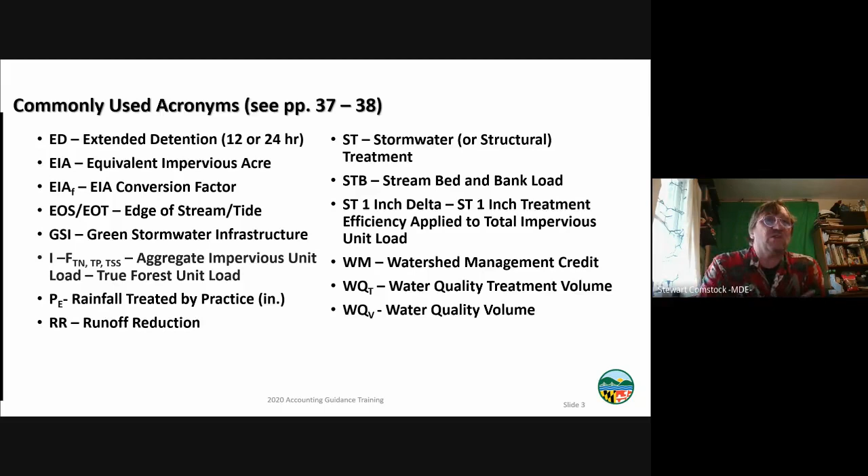You're going to hear us use I-F, which is the aggregate unit impervious unit load. PE is effective rainfall treated by a practice. We'll talk about STB, stream bed and bank load. We'll talk about an ST 1-inch delta. Finally, we'll talk about watershed management, water quality treatment, and water quality volumes.

When we talk about the restoration credits and accounting principles, imperviousness is still the MS4 permit surrogate for measuring level of implementation. The impervious acre credit is used for upland BMPs, in effect the Chapter 3 or Chapter 5 BMPs of the design manual. It is determined by three variables: drainage area, impervious area, and rainfall treated.

As in the 2014 guidance, impervious acres are 100% treated when the runoff from 1 inch of rainfall, or the water quality volume, is captured and treated.

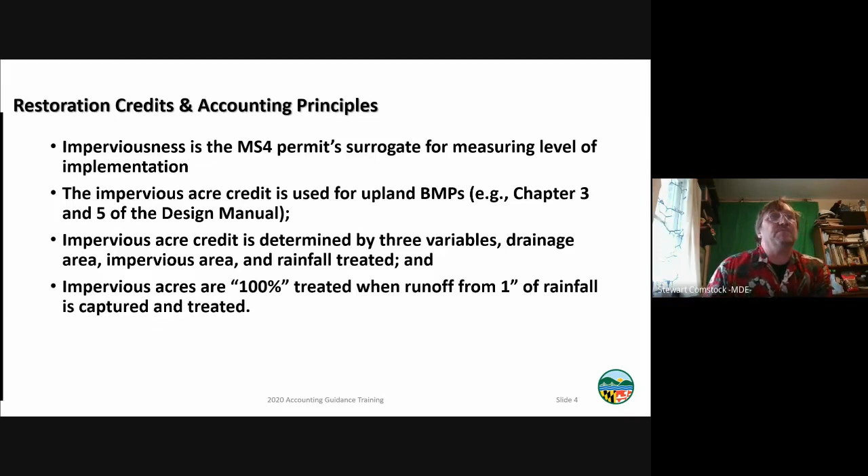With respect to alternative practices, we use the equivalent impervious acres. Alternative BMPs include the ones listed here, and we'll talk more about those later. The 2020 accounting guidance includes guidance for calculating equivalent impervious acres and pollutant load reductions. Again, these will be discussed in more depth as we move forward today.

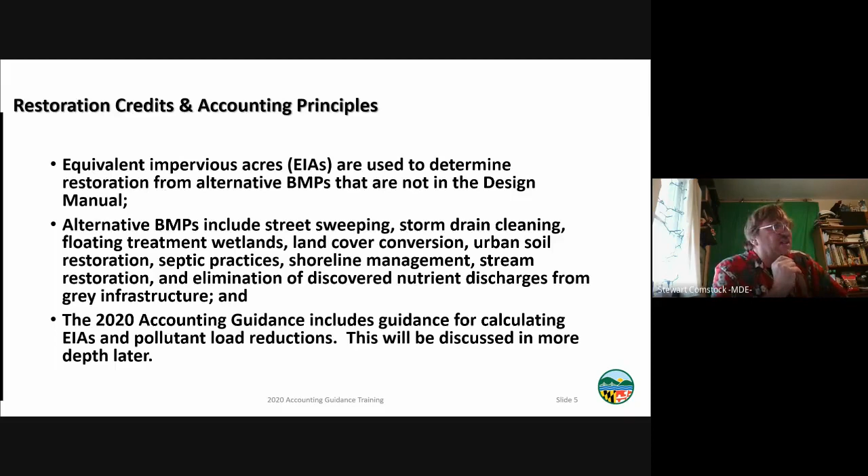So I'm here to talk about impervious acre credits for upland BMPs. Upland BMPs are those practices that meet the water quality criteria, the WQV, and design standards in the design manual. Chesapeake Bay program recognizes two categories of upland BMPs: runoff reduction or stormwater treatment practices.

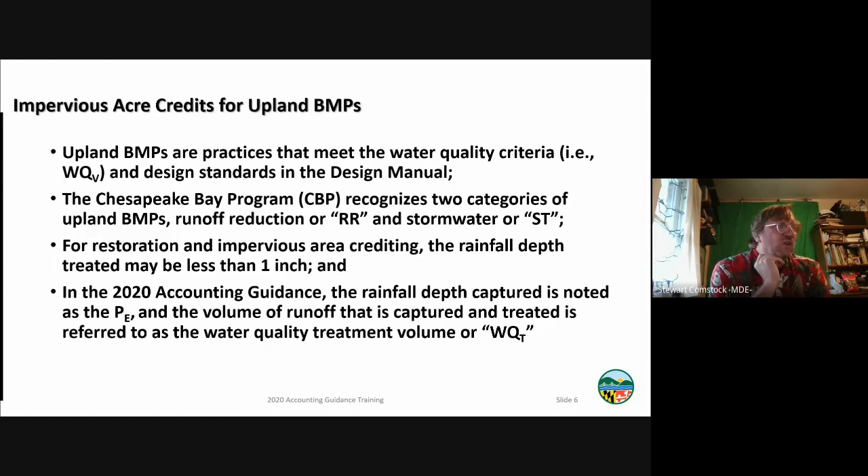For restoration and impervious acre crediting, rainfall treated may be less than 1 inch, and this is an important change. In the 2020 accounting guidance, the rainfall depth captured is noted as the effective rainfall, or PE. However, the volume of runoff that is captured and treated is referred to as the water quality treatment volume, or WQT. This is to keep it separate from the water quality volume found in the design manual.

This may look familiar because it hasn't changed from the 2014 guidance. The impervious acre credit for a structural practice is the rainfall depth treated over 1 inch up to a rainfall, or PE, depth of 1 inch of rainfall.

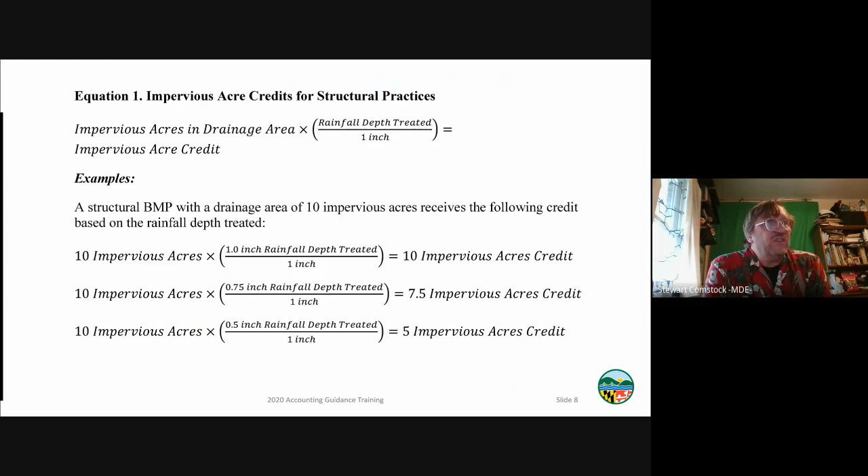So if I have 10 impervious acres and I treat 1 inch of rainfall, I get 10 impervious acre credit. Likewise, if I have 10 impervious acres and I only treat half an inch of rainfall, I only get 5 impervious acres of credit. Again, this has not changed.

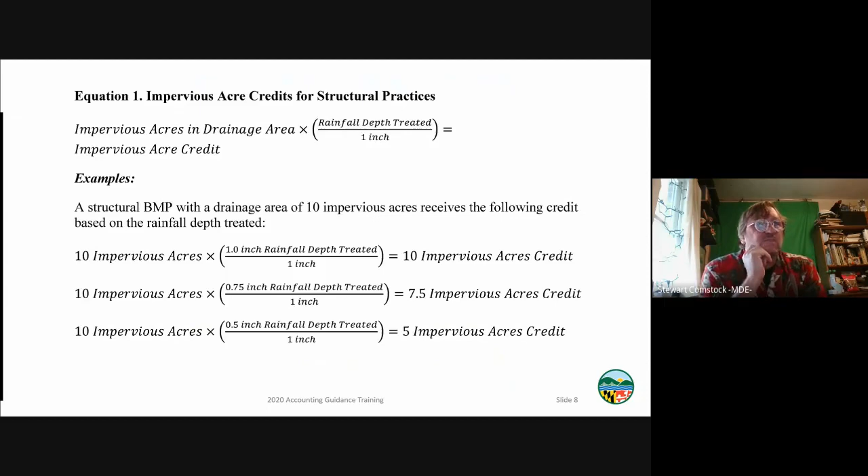Similarly, the way we assess non-structural practices and alternatives found on pages 4 and 5 of the accounting guidance has also not changed. So if you disconnect 10 impervious acres 100%, you get 10 impervious acres credit. However, if you only disconnect 10 acres 50%, you only get 5 impervious acres credit.

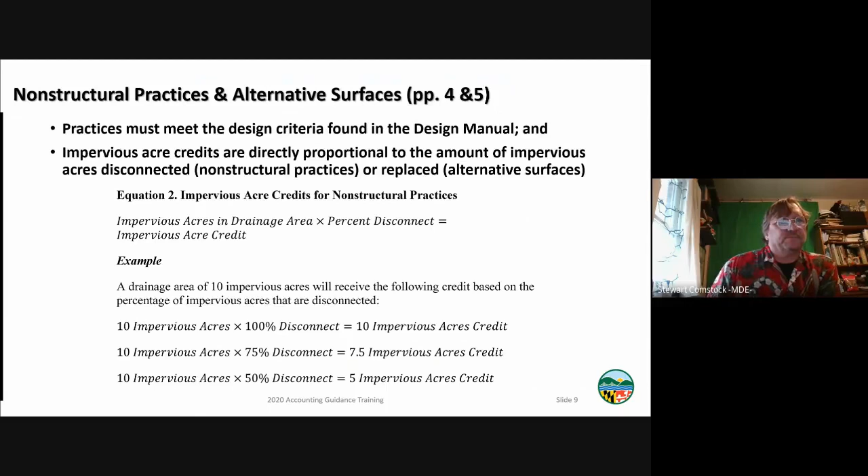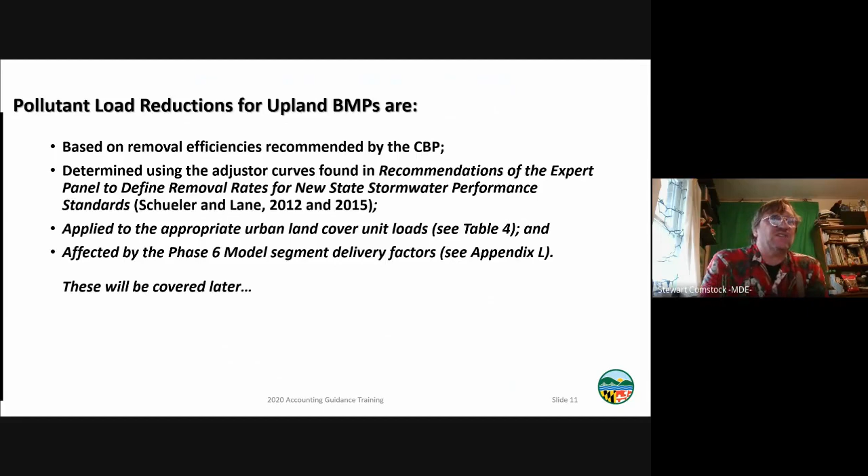I'm just going to briefly cover this because these will be covered in more depth shortly. Pollutant load reductions for upland BMPs are based on the removal efficiencies recommended by the Chesapeake Bay program. They are determined using the adjustor curves found in the publications from 2012 and 2015. They are applied to the appropriate urban land cover unit loads found in table 4 of the accounting guidance, and they are affected by the phase 6 model segment delivery factors. Again, some of this will be covered in the next presentation.

And here's table 3, found on page 8 of the accounting guidance, which talks about the pollutant removal efficiencies that may be applied to upland BMPs. Please note the 3 values at the bottom of the table highlighted in yellow. The Chesapeake Bay program charts only go up to 2.5 inches. However, for the purposes of the accounting guidance, we have extended those charts up to 3 inches.

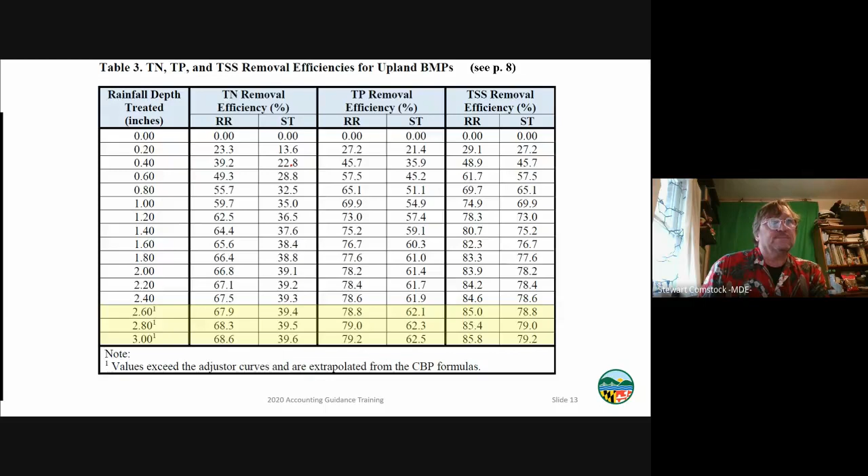Are there any questions at this point?

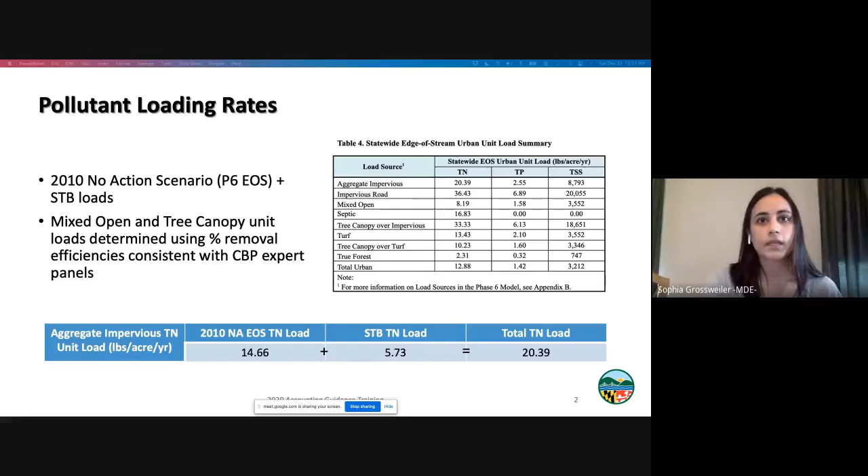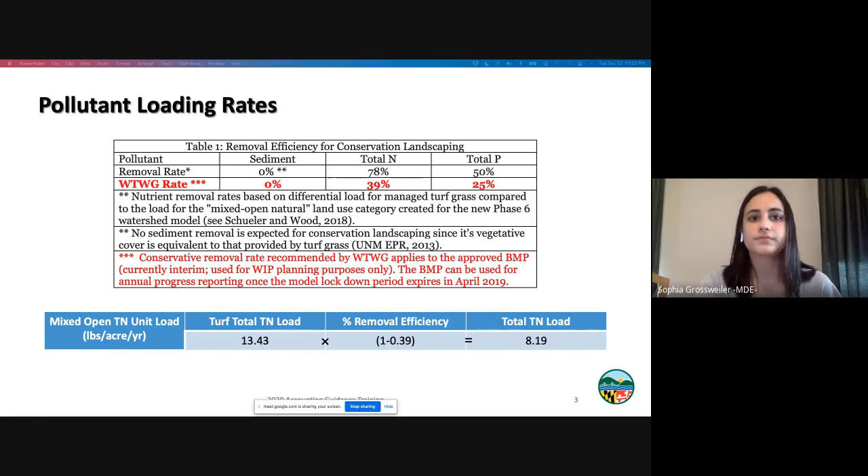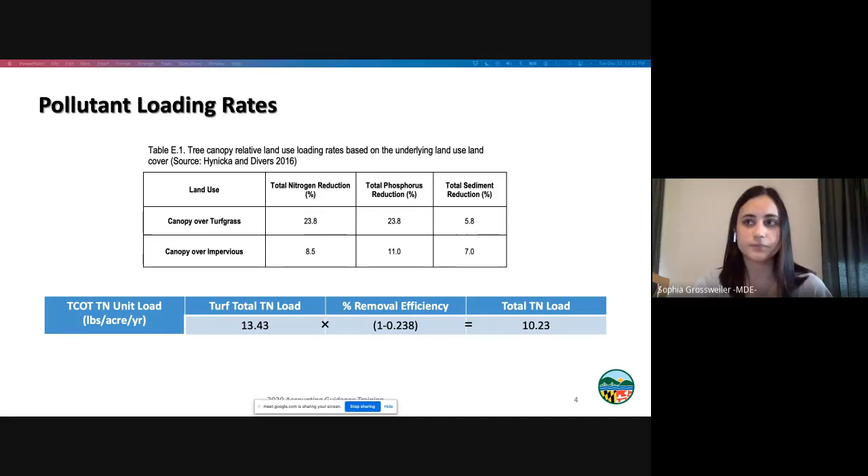To disaggregate the stream bed and bank load, we followed a method provided by Olivia Devereux, which was also presented at a previous MACO meeting and is detailed in Appendix E of the accounting guidance document. This process has already been done for you, and I'm only mentioning it here for transparency purposes—you're not required to perform these calculations.

But equation 17 in the accounting guidance document outlines the foundational formulas for calculating the stream bed and bank load using this method, and requires 3 main input variables: your CAST scenario edge of stream without STB load, a calibrated edge of stream without STB load, and an STB base load. The TSS STB load formula also requires an additional 4/3 times impervious TSS load.

So this is a very basic overview of the method, but for the sake of time and clarity, these are the 3 basic components of STB disaggregation.

First, you would use the equation 17 formulas to calculate each pollutant's STB load. You would determine a series of normalization ratios and then apply those back to your calculated STB load, which would ultimately result in your normalized disaggregated STB load. For more detailed information on this method, please see Appendix E in the accounting guidance document. Again, this process has already been done for you and you don't have to reproduce it.

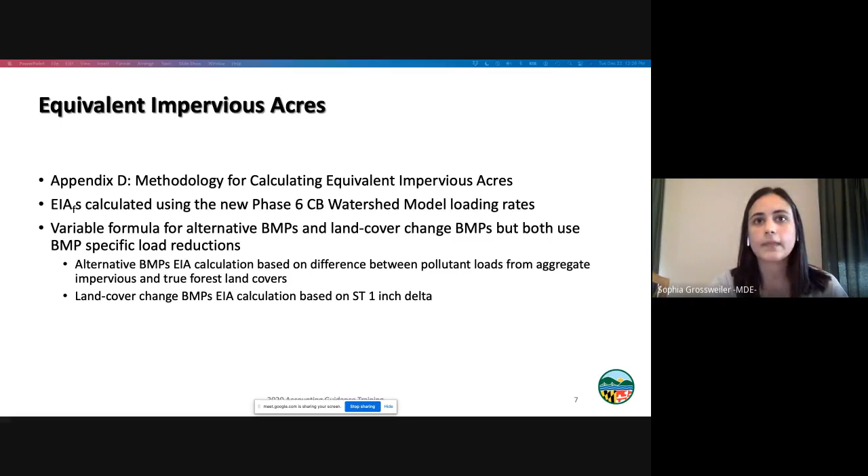Table 1 in the accounting guidance document outlines each BMP type mentioned in the document and their respective load reductions and equivalent impervious acre conversion factors. All load reductions and conversion factors have been calculated for you, so this would be your go-to table if you're trying to calculate your equivalent impervious acre credit. Appendix C outlines the load reduction formulas and pollutant removal efficiencies used to populate this table, if you're wondering.

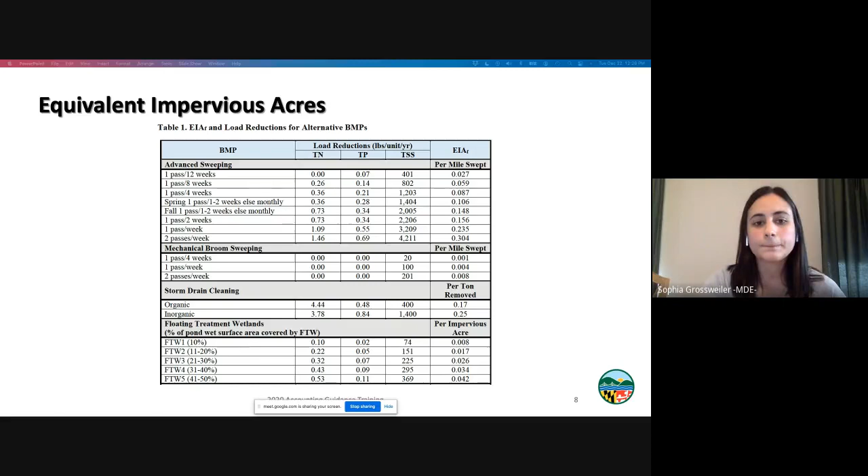Table 5 and Equation 5 in the accounting guidance document outline the process for determining an alternative BMP type's equivalent impervious acre factor. Table 5 shows how the impervious forest deltas are calculated—it's just the difference between aggregate impervious unit load and true forest unit load. These deltas are then substituted into Equation 5, dividing each pollutant load reduction, and the results of which are averaged, giving you the conversion factor.

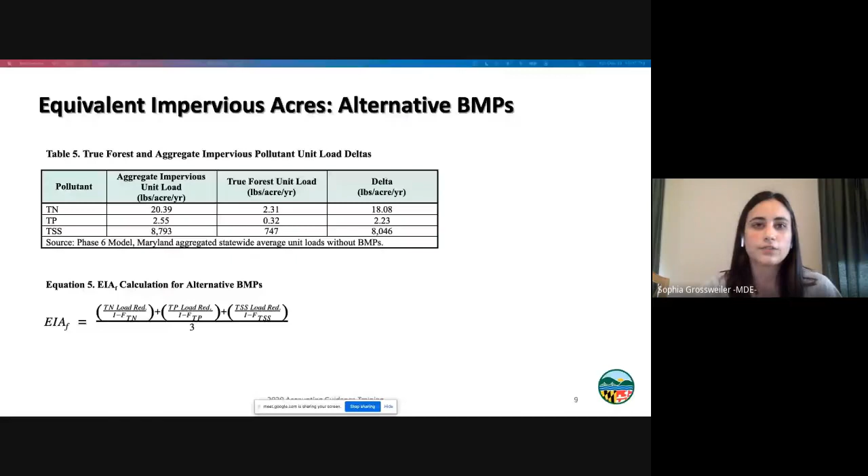So for example, if I wanted to check that the equivalent impervious acre conversion factor calculation in Table 1 was correct for an advanced street sweeping practice of 1 pass every 12 weeks, I would input the load reduction information listed in Table 1 into Equation 5, which gives me, as you see here, 0.027, matching what's in Table 1.

So this is just an example of what we've already done for you.

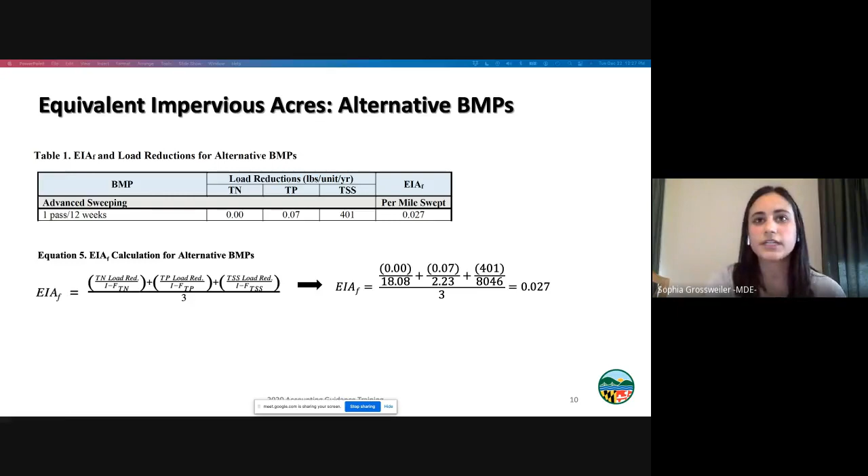Taking this example further, this example shown here is also taken directly from the accounting guidance document from Appendix F, which provides examples of calculating equivalent impervious acre credits for alternative BMPs.

To calculate my equivalent impervious acre credit for a street sweeping practice, I would need to multiply the number of miles swept by my equivalent impervious acre conversion factor.

So in this example, a jurisdiction is using advanced sweeping technology and sweeping 100 lane miles once every 12 weeks. So I'd go to Table 1 in the accounting guidance document and find what advanced sweeping practice that is and the conversion factor for it.

I would multiply that conversion factor, which is 0.027 in this case, by the number of lane miles swept, so 100 lane miles, and receive 2.7 equivalent impervious acres credit.

So for a land cover change BMP, Table 23 and Equation 16 in the accounting guidance document outline the process for determining this BMP type's equivalent impervious acre conversion factor.

Table 23 shows how our ST1 inch deltas are calculated, by multiplying our total impervious unit load by an ST1 inch pollutant removal efficiency.

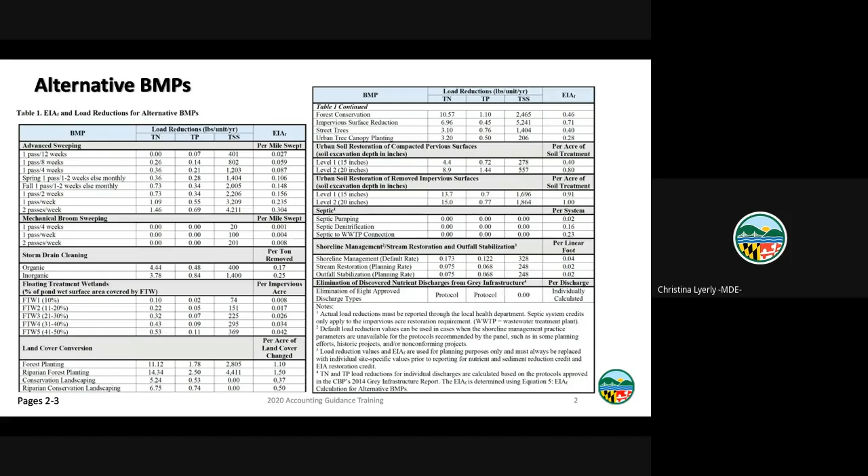If you would like to follow along, the table and page numbers throughout this presentation correspond to those in the June 2020 accounting guidance released with tentative determination.

The updated expert panel report provides considerably more options regarding the street sweeping frequencies MS4s can report and get credit for. Tonnage can no longer be used to calculate an EIA.

The expert panel determined that only a fraction of the solids picked up by sweepers would make it to the bay, and the WinSLAMM model is more technically and empirically based. The hopper method was prone to errors.

Curb lane miles swept are reported and represent one side of the street. When cleaning parking lots, 1 acre swept using advanced street sweeping technology is the equivalent of 1 curb lane mile.

Roads and parking lots without curbs and gutters do not get credit because the expert panel determined that they may create a net source of sediment if the adjacent pervious area is dislodged by the sweeper brush.

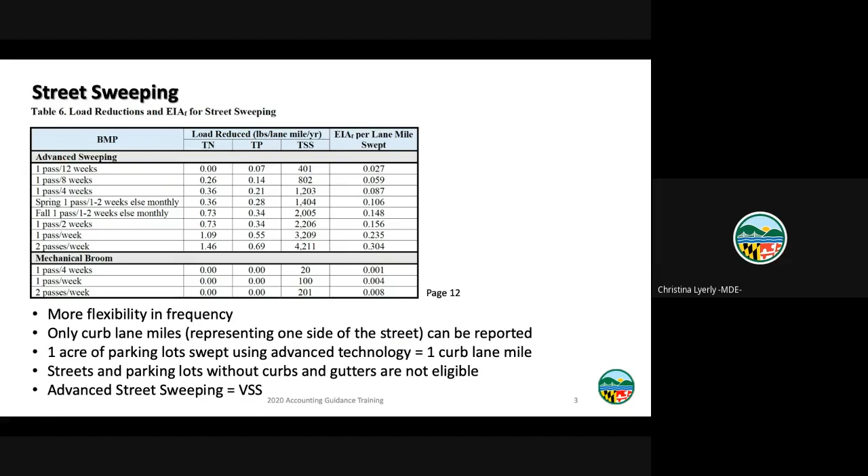Regenerative or vacuum street sweeping is referred to in the expert panel report as advanced sweeping technology, but the BMP code will remain VSS for the purposes of MS4 reporting.

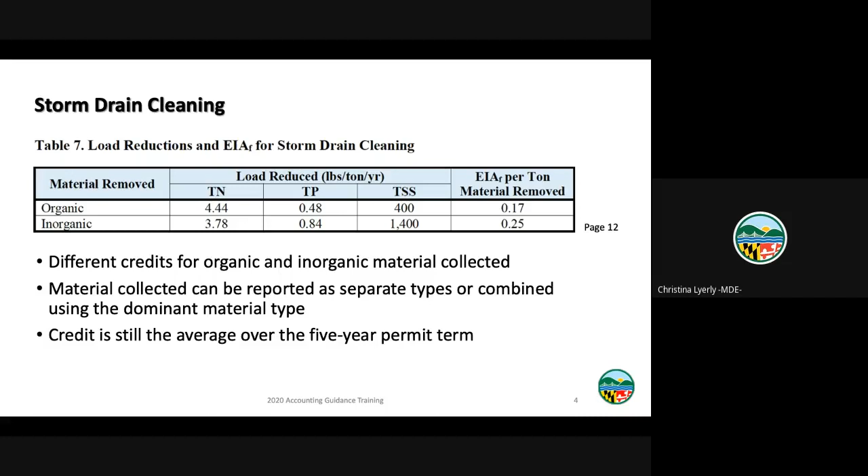For the storm drain cleaning BMP, there are different efficiencies and EIA factors for organic and inorganic material. MS4s can use their own process to best estimate the makeup of the material collected by storm drain cleaning. These can be reported either separately or as one by choosing the dominant material. These BMP efficiencies apply to what the geodatabase's BMP codes refer to as catch basin cleaning and storm drain vacuuming. This is still an annual BMP that is averaged over the 5-year permit term.

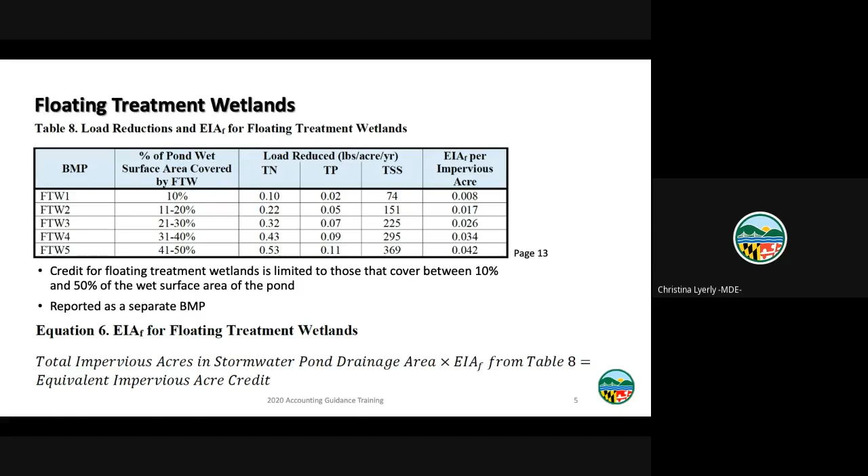The expert panel determined the pollutant removal rates for floating treatment wetlands based on the percent of pond wet surface area that they cover, as measured at the design permanent pool elevation. It is limited to between 10 and 50% coverage and is reported as a separate BMP from the pond. The equivalent impervious acre is simply the number of impervious acres in the pond's drainage area multiplied by the appropriate EIA factor found in this table.

As an example, there is a pond that has a rainfall depth treated of a half inch. There are 30 acres of impervious area draining to this BMP. As discussed by Stu earlier in the presentation, treating a half inch of rainfall provides treatment for half of the impervious acres draining to the practice. This pond would be entered as a BMP in the database as PWET. The 15 treated acres would be captured there.

A floating treatment wetland is installed in the pond. It covers 15% of the wet surface area. So according to this table, it would have an EIA factor of 0.017 per impervious acre in the drainage area. The EIA would be multiplied by 30 acres for an equivalent impervious acre restoration of 0.51 acres. This practice and EIA credit is reported separately as an alternative BMP with its own BMP code, XFTW.

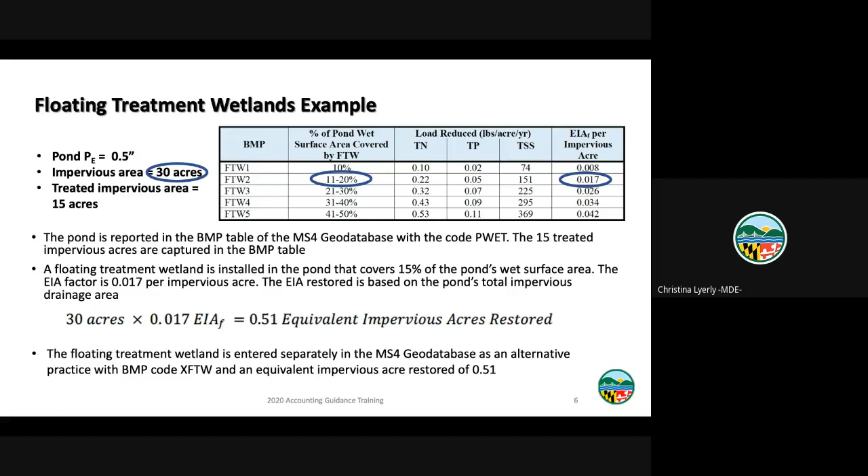The default rate can no longer be used for stream restorations or outfall stabilization, to be consistent with the expert panel report, which determined that individual site-level data collection is critical to improving the accuracy and consistency of calculations. The 0.02 EIA per linear foot can only be used as a planning rate. Final load reductions and equivalent impervious acres achieved can only be reported if the project is complete and all necessary site-specific data are collected.

The Chesapeake Bay Program approved updated methodologies for protocols 1, 2, and 3. The work groups recommended that these go into effect on July 1, 2021. The new protocol calculation memo includes a provision for Maryland to develop a state-specific treatable floodplain volume for Protocol 3. MDE will be looking into the research and technical justification to develop an allowable volume. This work will be completed by final determination.

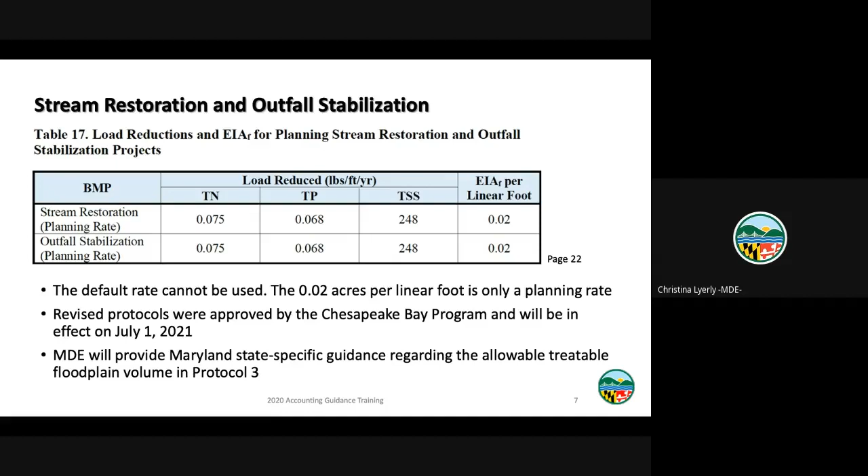A new BMP is the elimination of discovered nutrient discharges from gray infrastructure. What is unique about this BMP is that it has a maximum EIA credit that an MS4 can claim in a permit term. The CBP's Watershed Technical Work Group recommended a cap for nutrient reductions if the gray infrastructure loads were not explicitly simulated in the Phase 6 model. These loads were not simulated, but the expert panel has not reconvened to develop this cap.

Because the protocols allow default values to varying extents, and this is a new BMP that has mostly not been utilized, MDE took a conservative approach and followed CBP's recommendation. The maximum credit applies only to the EIA. There is no maximum for load reductions reported for TMDL progress.

The maximum is based on two assumptions provided in the expert panel report. First, nutrient discharges from gray infrastructure potentially contribute 20% of the dry weather load. And second, the dry weather load is 20% of the total annual nitrogen and phosphorus discharged from urban pervious land. This presentation provides a step-by-step example.

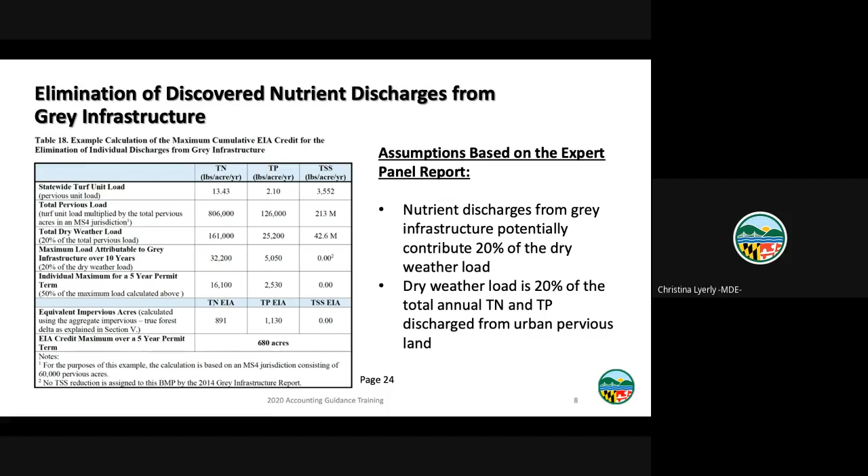The load attributable to gray infrastructure is associated with the total pervious load in the MS4, and this is where we begin. For the purposes of this example, the MS4 has 60,000 acres of pervious area, also known as turf. To find the pervious load, we multiply the unit load, or the loading rate of pounds per acre per year, by the number of acres. These unit loads are taken from Table 4 of the accounting guidance. So for nitrogen, it would be 13.43 multiplied by 60,000 acres to equal 806,000 pounds per acre per year.

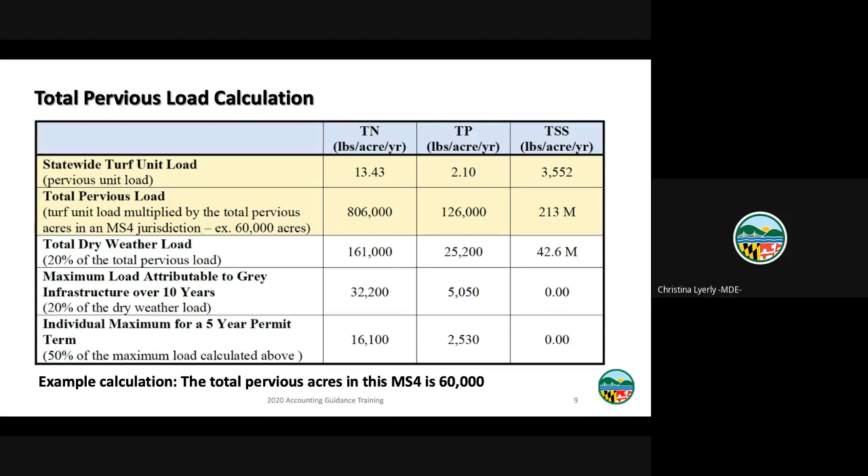Now that we know that the total pervious load is 806,000, we come to the expert panel assumptions. The total dry weather load is 20% of the pervious load, so 20% of 806,000 is 161,000. The load attributable to gray infrastructure is 20% of the dry weather load, so 20% of 161,000 is 32,200. This is over a 10-year period because the expert panel limited the lifespan of these credits to 10 years. They expire in the model as well as in the impervious acre restoration tally.

In order to continue receiving credit after 10 years, new nutrient discharges must be found and eliminated. The expert panel created this limit because gray infrastructure will continue to deteriorate over time, so a reduction in one point of the system may ultimately be negated by a new discharge.

Permit terms are 5 years, not 10, so the maximum load reduction credit in a permit term is cut in half. You'll notice the maximum sediment load is 0. This is because the expert panel report determined there was a lack of data, and the data available showed generally low concentrations.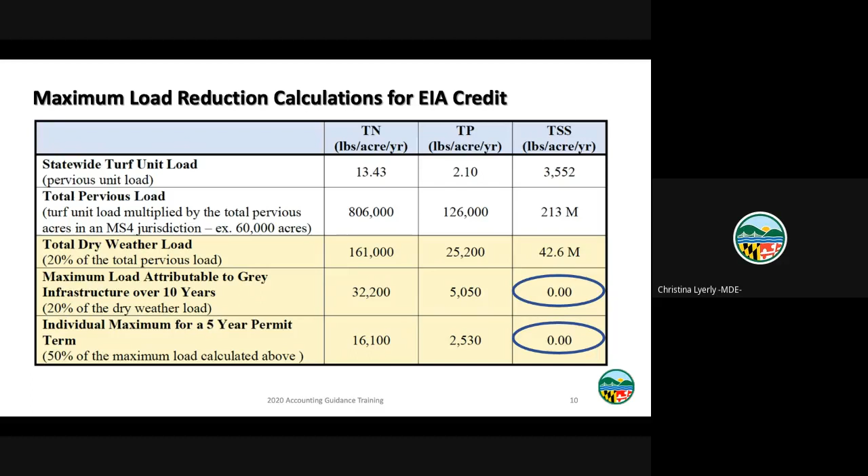For simplicity's sake, we condensed all of those steps, including the multiplication for the percentages, into a single equation found in the accounting guidance. The maximum load reduction in a 5-year term is the statewide turf unit load times pervious acres in the MS4 jurisdiction times 0.02.

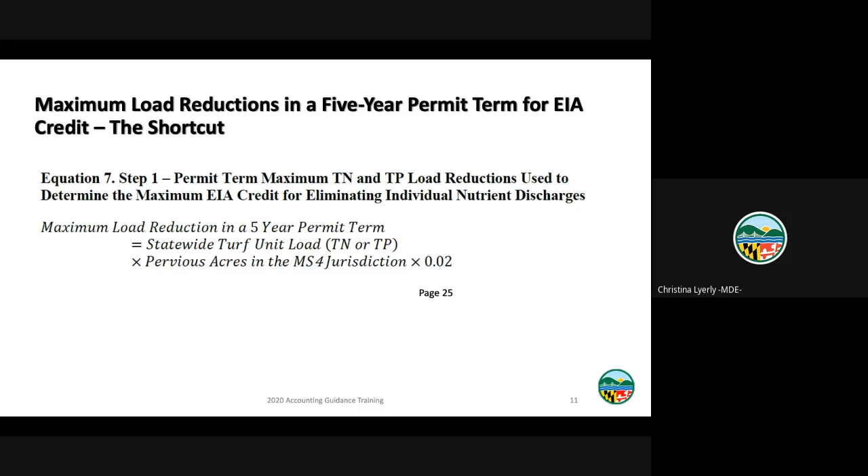The final step in this process is converting the maximum loads into a single EIA maximum credit. The impervious forest delta conversion equation used for other alternative BMPs applies here. The numerator is labeled a bit differently because it represents the maximum load reduction rather than the achieved load reduction. These TN/TP load reductions are inserted as the numerator, and the impervious forest delta values of 18.08 and 2.23 are standard values in the alternative BMP conversion equation.

The expert panel allows reductions for 8 types of discharges and details 3 protocols to calculate the reductions. The expert panel also specifies monitoring and verification requirements for each. Once you calculate your TN and TP reductions using these protocols, use the impervious forest delta EIA equation to determine the equivalent impervious acre restoration achieved.

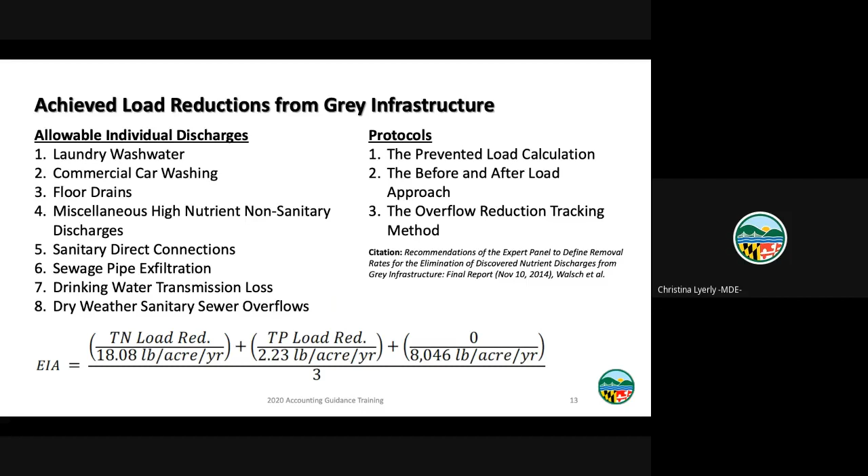The accounting guidance details several qualifying conditions. Prior to the date when individual discharges could be reported in the model, the expert panel provided an opportunity to claim nutrient reductions achieved through an advanced program. This was to give jurisdictions time to ramp up the data collection required to report individual discharges. The program credit is no longer available.

However, MDE has established that meeting the advanced program criteria as defined by the expert panel is a precondition for receiving credit for individual discharges. This ensures that reductions cannot be claimed simply by meeting the basic IDDE permit requirements.

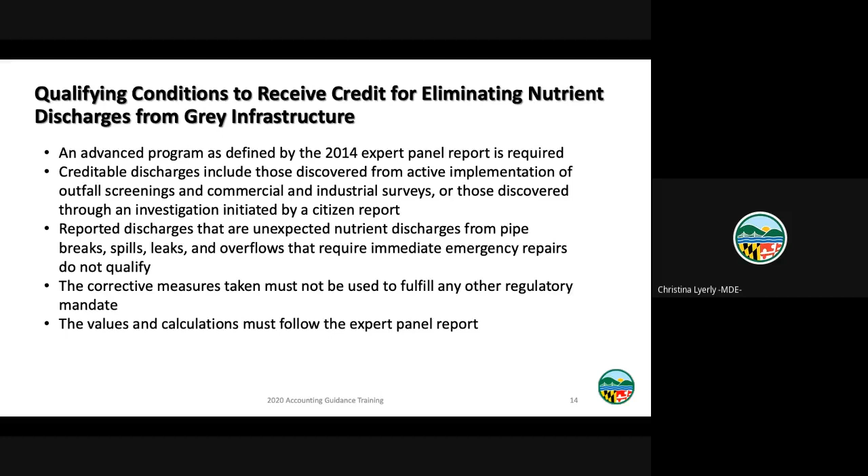The elimination of discharges found from outfall screenings and commercial and industrial surveys, and those resulting from investigations initiated after a citizen complaint, are eligible. Reported discharges that are unexpected and require emergency repairs, such as pipe breaks, cannot be claimed. The corrective measures cannot be required under another regulatory mandate, and the expert panel protocols must be followed.

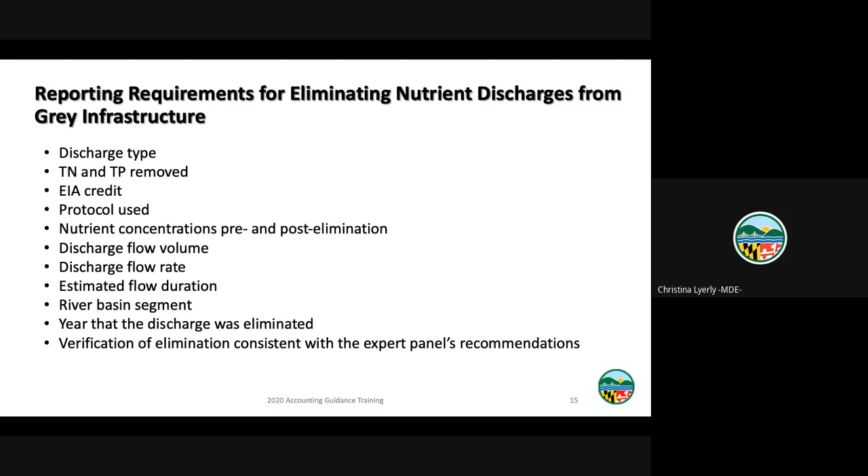The expert panel recommended a minimum set of data that should be reported to the regulatory authority to receive credit. MDE based the reporting requirements on those recommendations. The upcoming revision of the geodatabase will allow these discharges to be reported and credited as an alternative BMP.

Now, before I hand it over to Shannon to discuss land cover conversions, I'd like to pause here for any questions. Hi, Christina, very good.

We do have a couple of questions for you. Let's start with the IDDE. For inlet cleaning, what is the evidence needed for identifying the percent organic versus inorganic? Would visual estimations be sufficient?

Visual estimates are sufficient. The accounting guidance discusses that a process needs to be in place in order to come up with a best estimate.

Okay, great. And staying on IDDE, can you explain why the IDDE credit is cut in half for the 10-year credit? It's a cumulative credit with a 10-year cap. This calculation makes it appear that you'll only get half the credit in any given permit term.

For the credits you can receive in, let's say, the next 5-year permit term, that permit term is 5 years. You would receive credits up to half of that maximum EIA. Then in the next permit term, those credits don't expire, so it's cumulative. You would continue to receive credit for additional illicit discharges eliminated. We just cut it in half for the sake of the permit term.

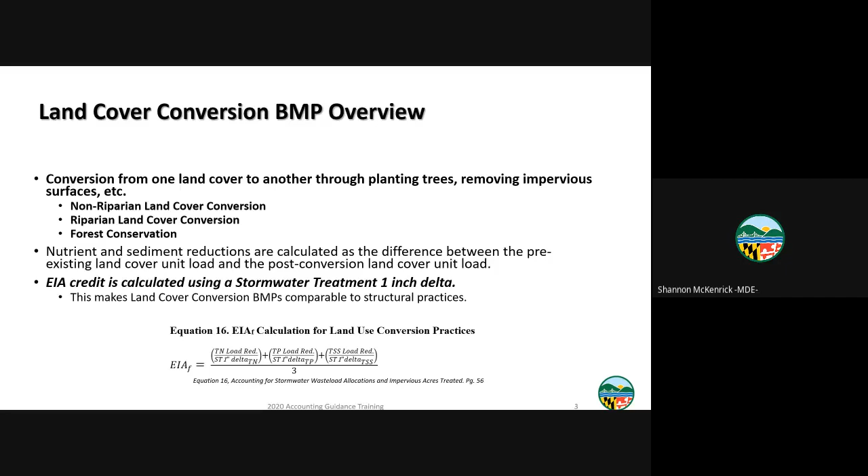Starting with forest planting, this is the conversion of turf to forested land cover. Conservation landscaping is the conversion of turf to an unmanaged meadow, using the mixed open land cover to calculate the credit. Impervious surface reduction is the removal of impervious surface to turf. Street trees is any tree planting occurring over an impervious surface, such as those in a sidewalk box. Note that for this one we use an impervious road unit load as the pre-conversion unit load to calculate credit, done to ensure a positive credit. Lastly, the urban tree canopy planting credit is the conversion of turf to tree canopy over turf.

Note that these land cover conversions can be combined for additive credit. So if a jurisdiction is undertaking a project to convert impervious surface to canopy over turf, the credit available for that project would equal the impervious surface reduction credit plus the urban tree canopy credit. In other words, the practice would be receiving credit for the conversion of impervious to turf, and then the conversion of that turf to tree canopy over turf.

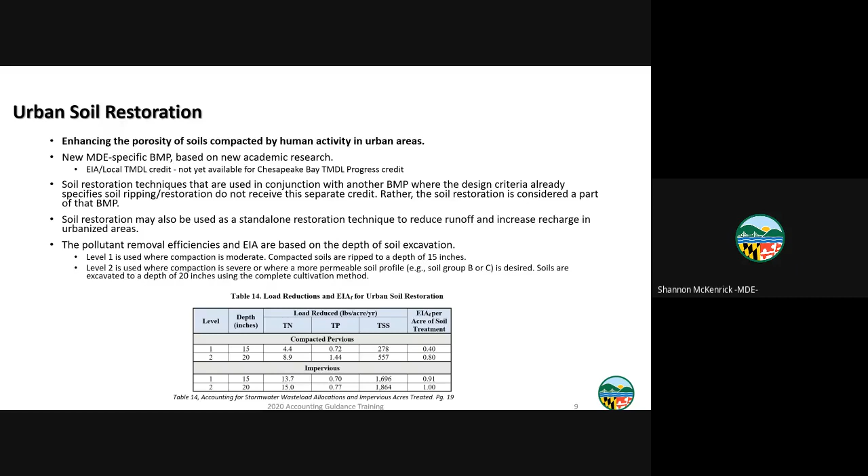And with that, I'll take any questions you have for me. Okay, Shannon, good job. We do have a couple of questions for you.

The first one: is there a difference in turf definition or crediting when trees are planted in an agricultural field within 100 feet of a stream? For example, would it be credited as ag field conversion or as a turf conversion? If the underlying land use is turf and it's not an actively producing ag field, there shouldn't be any difference in the available credit. However, in the accounting document we only have credit provided for a conversion from turf or some of these urban land uses to canopy over turf. If you were trying to receive credit for converting an ag land use, while the calculation would be similar, we'd have to look into that and get back to you.

Okay, great. And then another one on reforestation regarding the 1 acre minimum: this means that any reforestation smaller than 1 acre will be credited as tree canopy over turf, even when the ground cover will be managed as forest floor and the land will have the water quality functions of a forest. This will make many reforestation projects less effective, including expanding existing forest and riparian buffers by planting along the forest edge, or creating small reforestations within developed areas with fragmented cover.

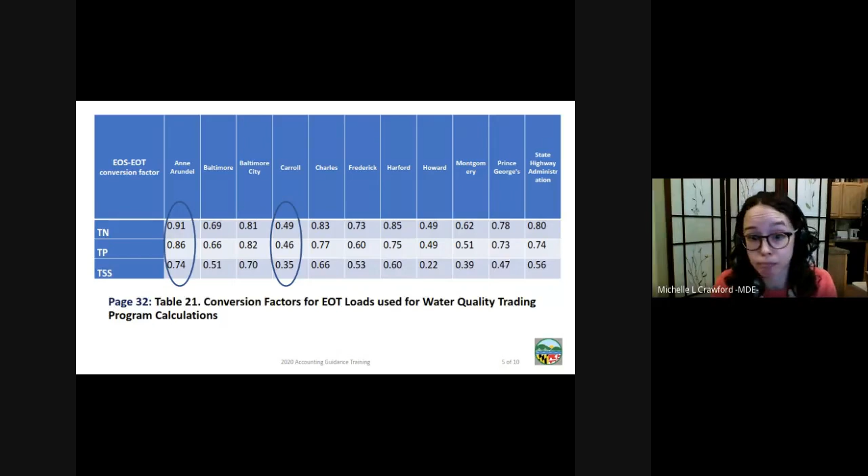So here, using 1 county as an example, you would need to acquire 17 nitrogen credits, 2 phosphorus credits, and roughly 6,000 credits of sediment. All three of these types of credits gathered together restore 1 impervious acre. So that's the first option.

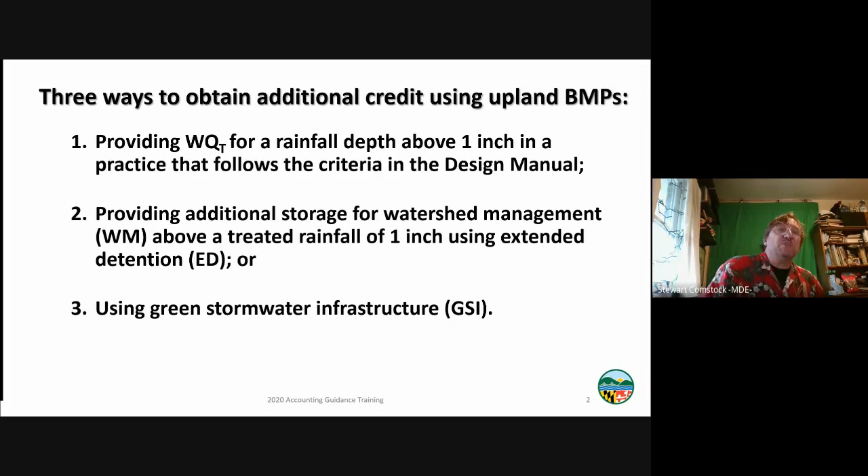So this is a review. Credit for additional water quality treatment. The impervious area credit is based on watershed imperviousness and depth of rainfall treated, and is 1-to-1 or 100% when you treat a rainfall of 1 inch. There is a 1-to-1 relationship between the rainfall depth and acres treated up to that rainfall depth or WQT of 1 inch.

However, it is quite conceivable that best management practices may be designed to treat more than 1 inch of rainfall. However, we have to recognize that when you treat more than 1 inch of rainfall, the pollutant removal efficiencies of these BMPs oftentimes is much less than that when it's between 0 and 1 inch.

So when the water quality treatment is greater than 1 inch, but less than 3 inches, the ratio of rainfall depth and impervious acres treated decreases to 0.25 to 1, or you get 1/4 of an acre for every inch above 1 inch of treatment that you provide in water quality.

The reason for this change, and this is the Chesapeake Bay adjuster curve for total phosphorus, is that the slopes of the lines from 1 inch to 3 inches is much less than the slope of the line from 0 to 1 inch, right? It's about 1/4 less, and therefore you get 1/4 of an acre for every inch of rainfall as opposed to 1 acre for every inch of rainfall.

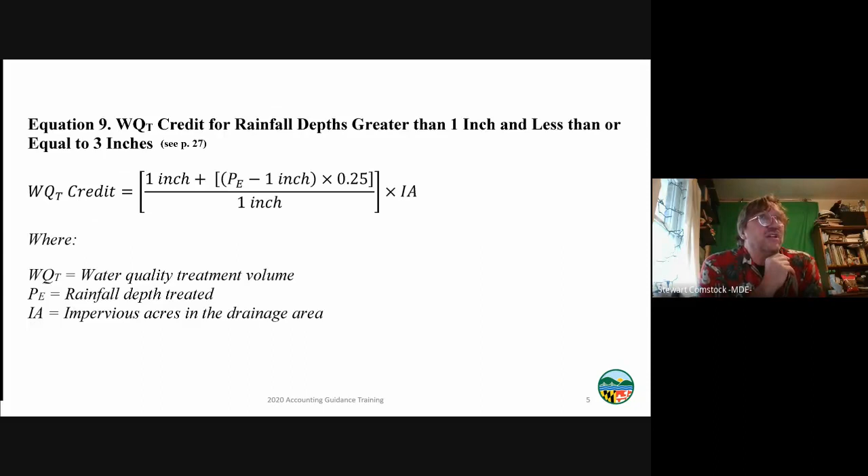So for example, I have a permanent pool here of 1 inch. I also have extended detention storage equal to 1 inch. Please note that because the permanent pool is 1 inch and the extended detention storage is 1 inch, this is a 50%, 50%. That additional 1 inch of storage may be considered as part of the water quality treatment.

So in this case, the water quality treatment credit would be the 1 inch treated by the permanent pool plus the 2 inches total, 1 plus 1 equals 2, minus the 1 inch treated in the permanent pool times the 1/4 acre, which would equal 1.25 times my impervious acres. So if I had 10 impervious acres in the watershed, I would receive 12.5 acres of impervious credit for this practice.

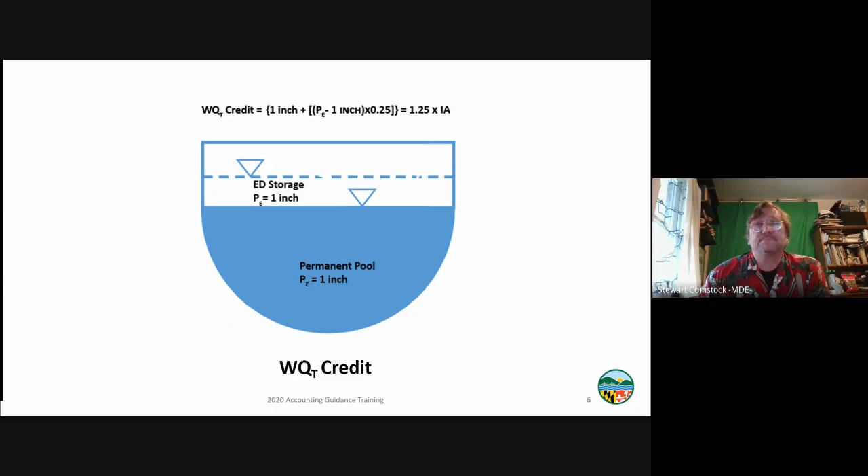Now, we also recognize that BMPs may be designed to provide multiple functions, and one of those might be flood control, and there might be additional storage above the water quality treatment that is providing some form of flood storage, but may not meet the 12-hour or 24-hour extended detention criteria.

However, these upland BMPs with additional storage are more resilient to changing weather patterns. And so we do want to give you additional credit when extended detention is used to release additional rainfall. The credits are available for temporary storage volume for rainfall depths between 1 and 3 inches. And again, it's at that same ratio of 0.25 to 1.

Now, I know this sounds a lot like the water quality treatment volume we just discussed, but hang in there. Like the water quality treatment volume, the watershed management credit is calculated the same way. It's the rainfall treated minus the water quality treatment times 1/4 over an inch.

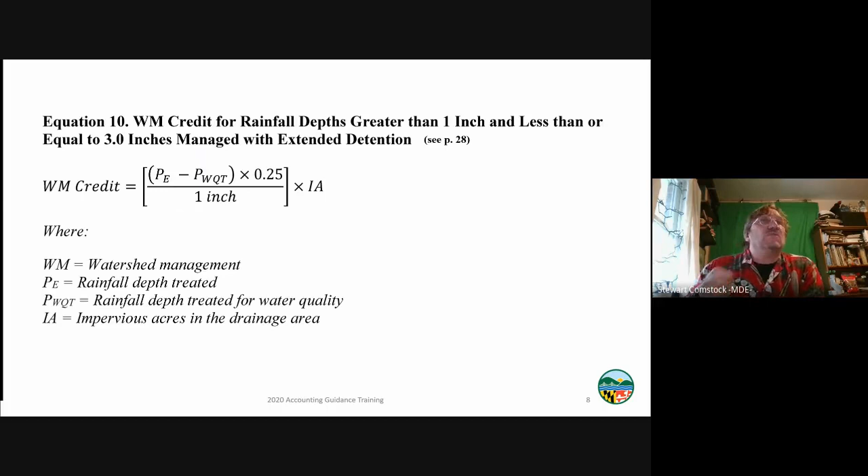Let's see how it's different. In this example, I have a permanent pool equal to 1 inch, with additional storage in this practice up to 2 inches. However, my ED storage for water quality treatment must be no more than the same as my permanent pool—it has to be a 50-50 split. So if my permanent pool is 1 inch and my ED storage is 1 inch, any additional volume above that for extended detention would now be considered my watershed management credit.

In this example, my water quality treatment credit is still 1.25 acres, as we calculated earlier. However, because I have this additional inch, I can multiply that by 1/4 as well. So my total credit is the water quality treatment credit plus the watershed management credit, which is now 1.5 times the impervious acreage. So if I had 10 impervious acres in the watershed, I would have an impervious acre credit of 15 acres for this practice.

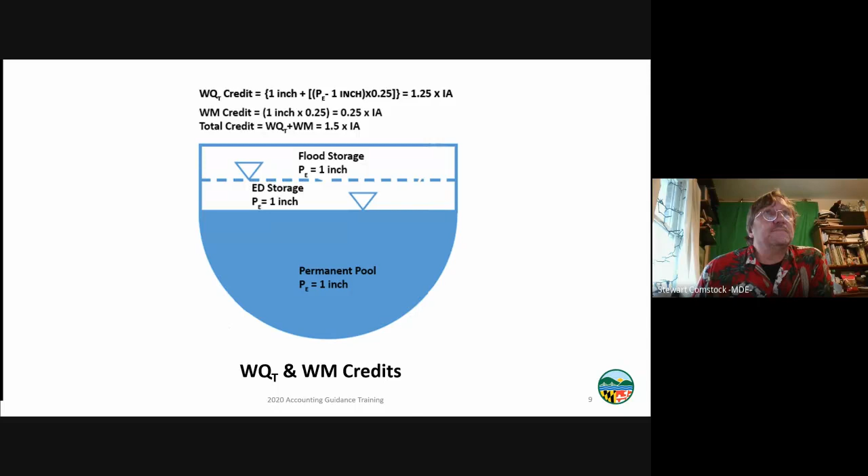The third co-benefit listed in the accounting guidance is credit for green stormwater infrastructure. Upland BMPs that provide water quality treatment and incorporate natural processes are eligible for the Green Stormwater Infrastructure Credit. These features mimic the pollutant load reduction efficiencies of runoff reduction practices in the Chesapeake Bay Program curves. Runoff reduction practices are about 35% more effective at removing TN, TP, and TSS than their stormwater treatment counterparts. Therefore, green stormwater infrastructure practices achieve a credit equal to 1.35, or 35% more, than the impervious acre credit achieved through just straight water quality treatment.

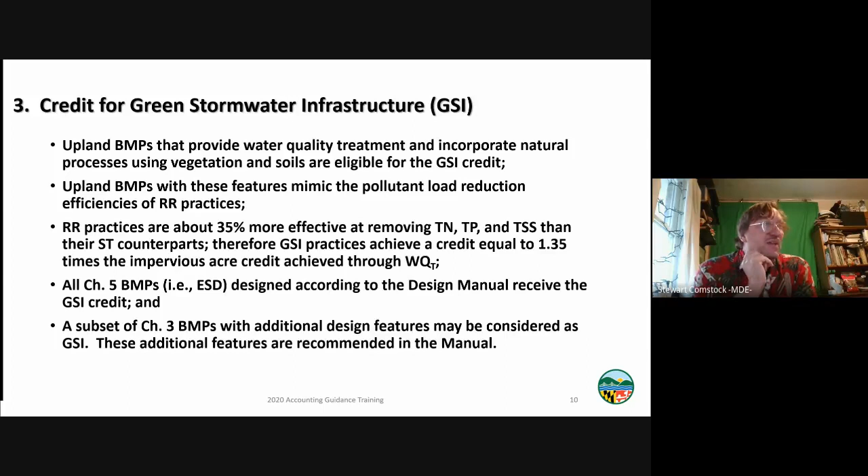Please note, all Chapter 5 best management practices—ESD, designed according to the manual—receive the GSI credit. Additionally, there is a subset of Chapter 3 practices with additional design features that may also be considered as green stormwater infrastructure. These additional features are oftentimes the recommendations found in the design manual for these various practices.

So where did we come up with this 35%? Here's this Chesapeake Bay Program adjuster curve for total phosphorus. As you can see, there's a difference between the runoff reduction and the stormwater treatment practices. On average, when you look at all three curves, this is about a 35% difference, and so we're going to give that additional 35% impervious acre credit. In the 2014 guidance, there was no such credit given whether you're using a runoff reduction or stormwater treatment practice.

As I mentioned, all Chapter 5 practices are considered ESD and therefore are also considered runoff reduction. Several of the Chapter 3 structural practices—most of the ponds and wetlands—may be considered green stormwater infrastructure with additional bells and whistles.

Please note, infiltration trenches, infiltration basins, surface sand filters, organic filters, pocket sand filters, and bioretention are on the list and may also be considered green stormwater infrastructure if the recommendations in the manual, which I'm about to list again, are followed. Bioretention from Chapter 3 has fewer requirements than microbioretention from Chapter 5, and that is why it is on this list.

Please note, if your practice is located under pavement, or is an underground practice, or is encased in concrete and does not mimic natural processes, it's not going to be eligible for the Green Stormwater Infrastructure Credit.

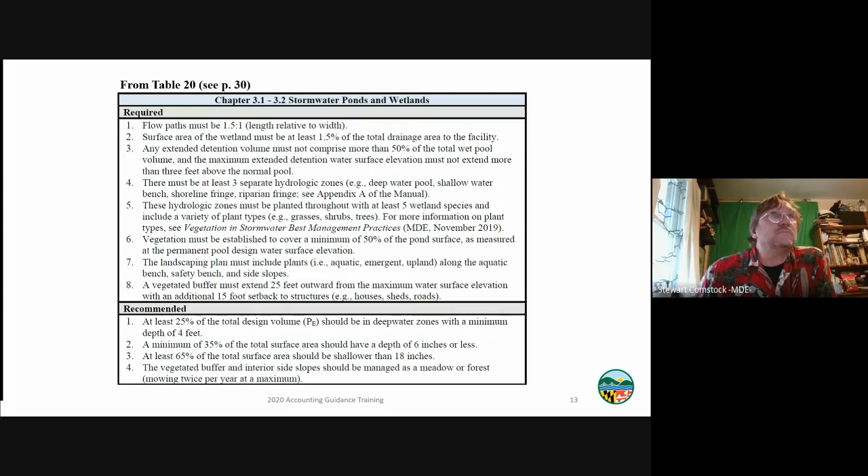Also from Table 20 on page 30 are the required and recommended elements for stormwater ponds and wetlands to be considered green stormwater infrastructure. Please note that these features are mostly related to the type and amount of vegetation being established in the facility. Much of this guidance comes from the Vegetation in Stormwater Best Management Practices guidance published by MDE back in November of 2019.

Again, many of these things are recommendations in the 2000 manual. So the Green Stormwater Infrastructure Credit only applies to the water quality treatment portion of any credits previously calculated, and it is 1.35 times the calculation of the water quality treatment credit.

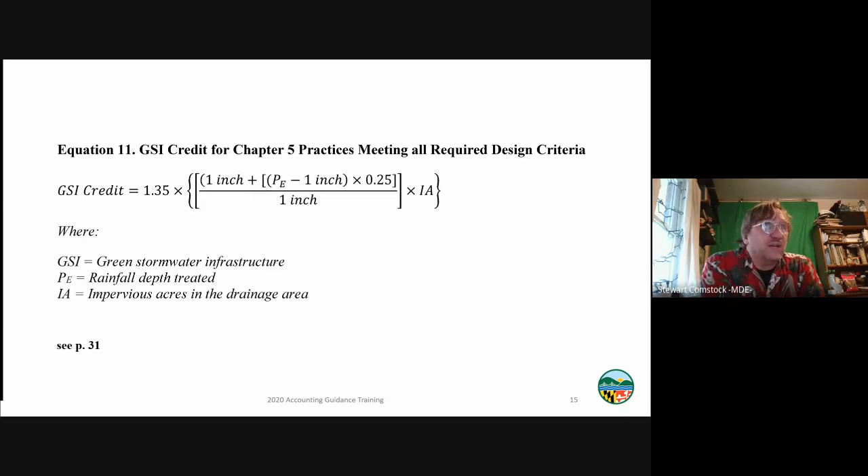So in this example, I've got a wet pond. It's got a permanent pool equal to 1 inch and ESD storage equal to 1 inch. So I have 2 inches of water quality treatment. But the whole facility has been designed as green stormwater infrastructure.

The water quality treatment credit is 1.25 times the impervious acreage. However, because this is now considered green stormwater infrastructure, we multiply that by 1.35, and so the new impervious acre credit for this facility is 1.69. So if there were 10 impervious acres draining to this facility, it would now have an impervious acre credit of just under 17 acres.

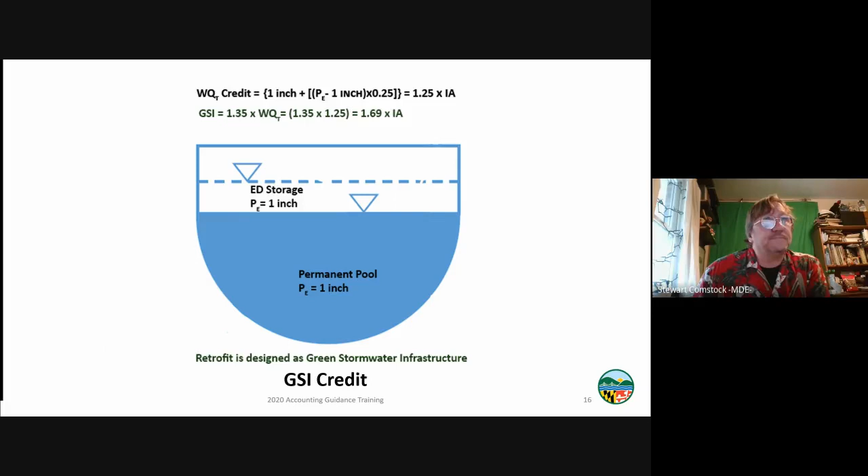Okay, it is completely acceptable to combine these credits. Obviously, upland BMPs may include additional water quality treatment. They could have additional storage volume, and all or parts of the facility could be considered green stormwater infrastructure.

If the GSI credit is applicable, it replaces the water quality treatment credit. As we've just seen, you would multiply the water quality treatment credit by 1.35. If the upland BMP can claim the watershed management credit and the green stormwater infrastructure credit, the watershed management credit above the water quality treatment volume is added to the GSI credit for the total credit for the project.

Again, just as a reminder, for water quality practices with extended detention, 50% of the total water quality volume provided can be in the form of extended detention. So if I had up to a total PE of 3 inches, how would I get 3 inches? The wet pool would have to be designed to capture or have a PE of 1.5 inches, and the extended detention volume then could be an additional 1.5 inches.

However, if my wet pool has a PE of 1 inch, then the maximum water quality treatment credit I could claim would then be 2 inches.

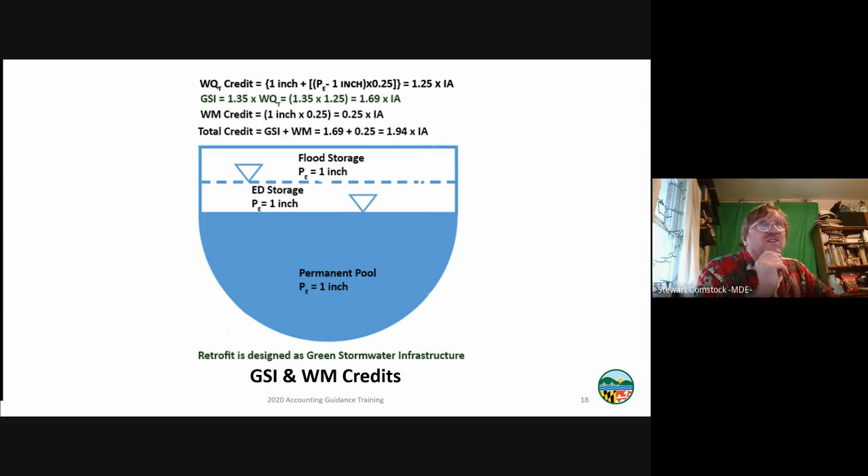Now, we're going to get a little more complicated, and I apologize. There are a number of older upland BMPs that provide water quality for 1/2 inch of rainfall, the old first flush rule. And many of these have been retrofitted to provide treatment for 1 inch. If there's no green stormwater infrastructure credit, the pre-conversion volume, the 1/2 inch, is subtracted from the water quality treatment credit to get your new credit. So in this case, 1 inch minus 1/2 inch equals 1/2 inch.

If there is a green stormwater infrastructure credit that is applicable, that factor would be applied to the portion of the facility that meets the GSI criteria, and then you would subtract out the pre-conversion volume. So for example, if the entire facility was modified for green stormwater infrastructure, your new area credit would be the GSI factor times your water quality treatment minus your pre-conversion. So I'd have 1.35 times 1 inch minus the 1/2 inch, which would equal 0.85 acres.

However, if only the new part of the facility had been modified for green stormwater infrastructure, the green stormwater infrastructure credit would only apply to that new part. So your credit would be the water quality treatment minus the pre-conversion, and then you would multiply that by 1.35. So your credit is noticeably less here. It's 0.68 acres.

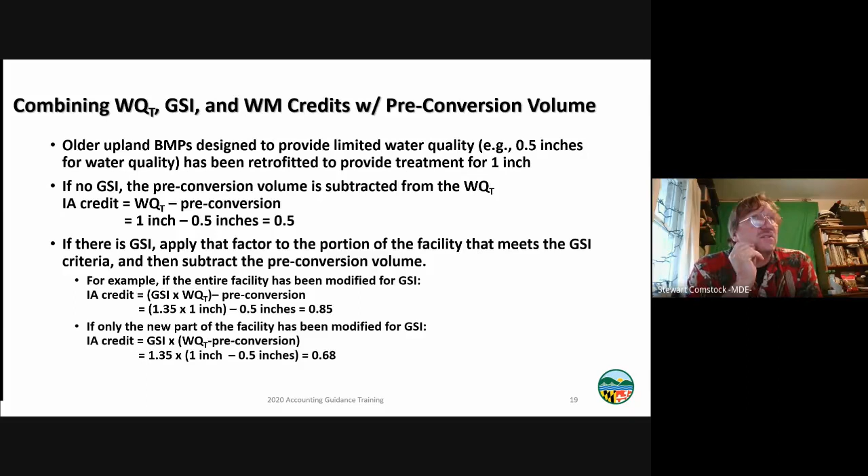Now, before we ask any more questions, we're going to allow Nora Howard to talk, because she's going to present some more examples of this, and then we're going to hold your questions till after she's presented her section.

Thanks, Stu. Pull up my slides. Can you see my slides and hear me? Yes, Nora, we can see your slides and we can hear you, so go ahead.

Great, thanks. Hi, my name is Nora Howard, and I'll be talking about reporting co-benefits in the geodatabase. So this is an excerpt of the proposed updates to the geodatabase schema, and it's part of what was shared during the November meetings about the larger proposed updates to the geodatabase. I've taken out the fields that are relevant to reporting co-benefits, and I'll go through those, and then go through some examples to see how data will be reported using these fields.

The examples that I'll go through include BMPs that provide water quality treatment as well as some extended detention. So now going through the fields, I put the new fields in bold, so for your notice.

Going through them, we have the PE addressed, which is the rainfall depth treated for water quality. The PE total storage is the total rainfall depth managed, which includes the rainfall depth treated for water quality as well as any additional rainfall depth captured in extended detention.

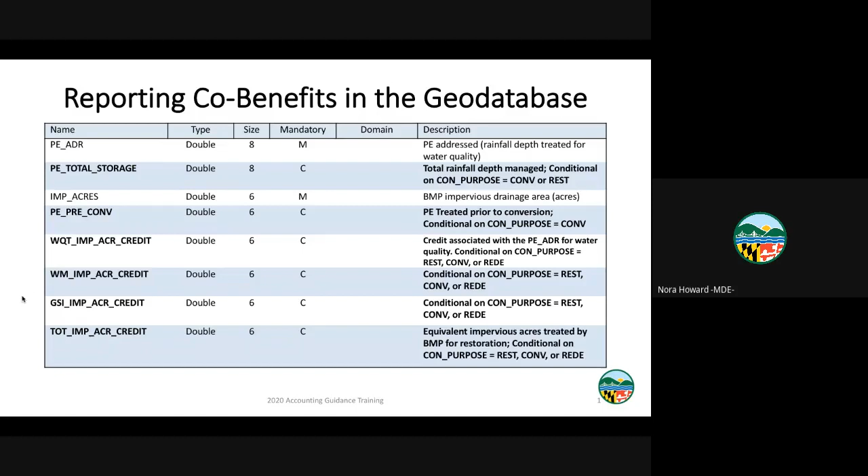The water quality treatment impervious acre credit is the credit associated with the PE addressed for water quality. The watershed management impervious acre credit, the green stormwater infrastructure impervious acre credit, and the total impervious acre credit is the equivalent of impervious acres treated by a BMP for restoration, and it encompasses the credit from the prior three fields. Now going through some examples.

The examples are largely from Appendix I in the accounting guidance, with some additional language for explanation in this presentation. In this first example, we have a generic scenario with no co-benefit.

We have a wet retention pond with a permanent pool water quality treatment volume for a rainfall depth of 1 inch. So our PE addressed is 1, and since there is no additional extended detention, the PE total storage is also 1. There are 10 impervious acres in the drainage area to the pond, so we can enter 10 in the impervious acres field, and since there's no conversion, the PE pre-conversion field is not applicable here.

We use the impervious acre credit equation to find that there are 10 impervious acre credits for this project, and we will enter that in the water quality treatment impervious acre credit field. We're not using the other co-benefits, so the watershed management and GSI impervious acre credit fields are not applicable, and the total impervious acre credit will be entered as 10.

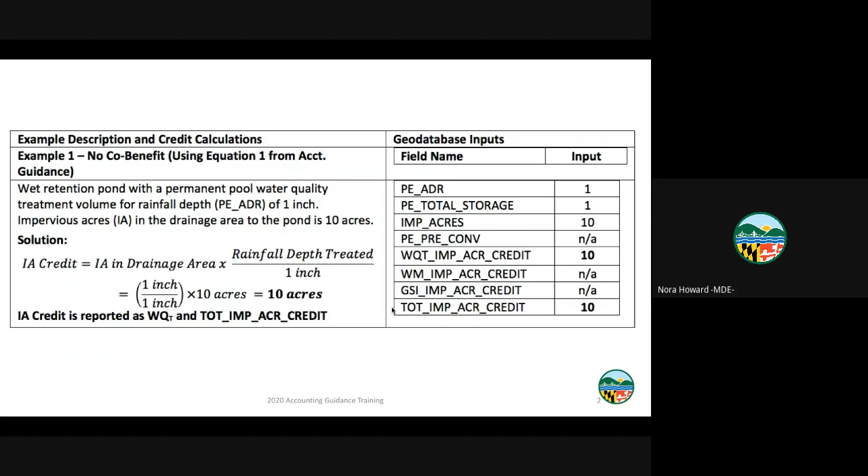In the next example, we'll use the water quality treatment co-benefit. We have a wet retention pond with a permanent pool water quality treatment volume for a rainfall depth of 2.6 inches. So the PE addressed is 2.6, and since there's no additional extended detention, the PE total storage is also 2.6. There are 10 impervious acres in the drainage area to the pond, so we enter 10 in the impervious acres field, and there's no conversion, so the PE pre-conversion field is not applicable.

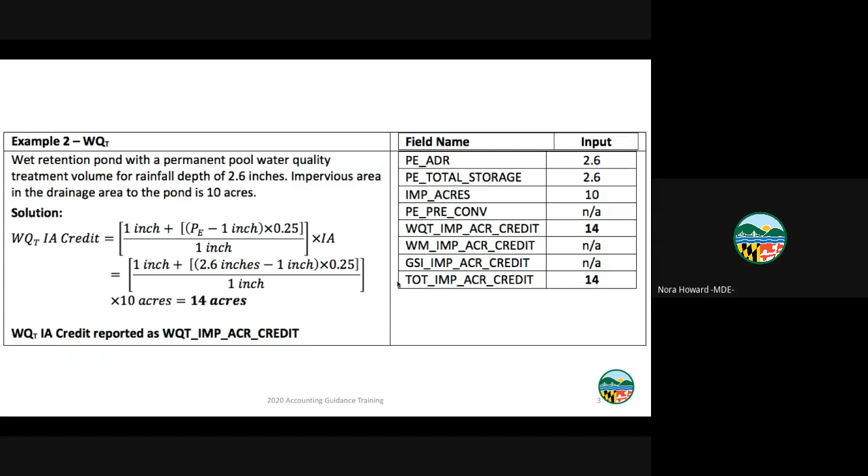We use the water quality treatment co-benefit impervious acre credit equation to see that there are 14 acres of credit for this BMP, and we report that in the water quality treatment impervious acre credit field. We're not using the other co-benefits, so those two credit fields are not applicable, and the total impervious acre credit is 14. In the next example, we use water quality treatment and watershed management co-benefits.

There's a wet extended detention pond with a permanent pool treatment volume for a rainfall depth of 1 inch and an extended detention volume for an additional 2 inches. So the rainfall depth for water quality is equal to the 1 inch permanent pool plus 1 inch of extended detention storage. So the PE addressed is 2, and the total rainfall managed is 3 inches, so the PE total storage is 3.

There are 10 impervious acres in the drainage area to the pond, so we put 10 in the impervious acres field, and there's still no conversion, so the PE pre-conversion field is not applicable. We use the water quality treatment co-benefit impervious acre credit equation to find 12.5 acres of credit for water quality treatment, and we can enter that in the water quality treatment impervious acre credit field.

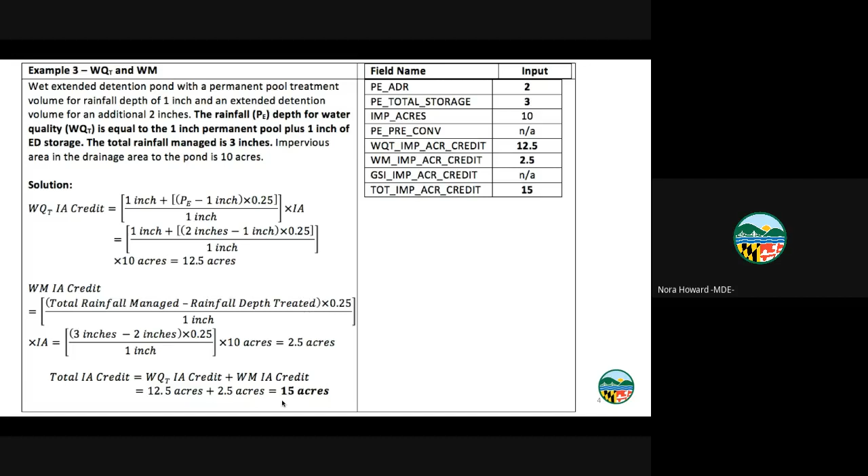We use the watershed management impervious acre credit equation to find 2.5 acres of credit for watershed management, which we can enter in this field. The GSI credit is not applicable here since that is not part of the BMP. To find our total impervious acre credit, we sum the 12.5 acres for water quality treatment and the 2.5 acres for watershed management to find 15 acres for our total impervious acre credit.

The next example, we use water quality treatment and green stormwater infrastructure co-benefits. There's a wet retention pond with a permanent pool treatment volume for a rainfall depth of 2.6 inches. So the PE addressed is 2.6, and since there is no additional extended detention, the PE total storage is also 2.6. There are 10 impervious acres in the drainage area to the pond, and there is no conversion, so that field is still not applicable.

And now we have green stormwater infrastructure features added to meet GSI credit requirements. So we use the water quality treatment impervious acre credit equation to find 14 acres for water quality treatment, and we use that in the green stormwater infrastructure impervious acre credit equation to find 18.9 acres for GSI credit.

Since the GSI credit encompasses the water quality treatment impervious acre credit, it will be the only one reported in the geodatabase. So when GSI credit is being reported, the water quality treatment impervious acre field will not be applicable. And in this scenario, we're not using watershed management either, so that field is also not applicable. So our total impervious acre credit is the GSI credit of 18.9.

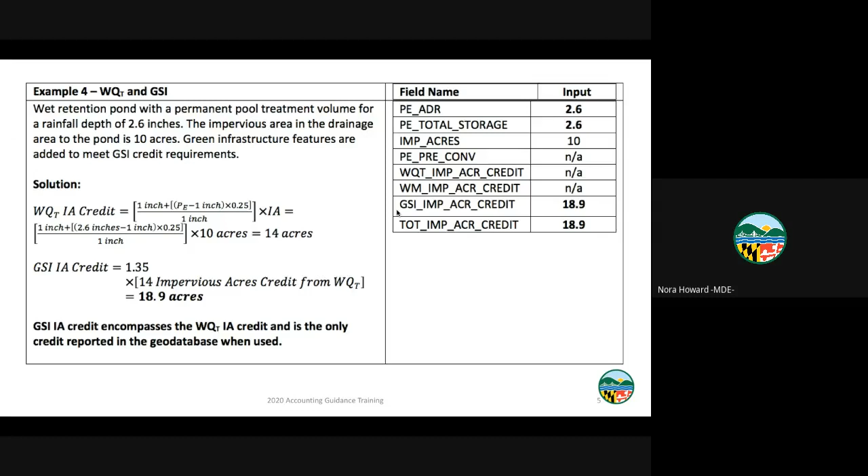In the next example, we'll use all three co-benefits. We have a wet extended detention pond with a permanent pool treatment volume for a rainfall depth of 1 inch and extended detention volume for an additional rainfall depth of 2 inches. The rainfall depth for water quality is equal to the 1 inch permanent pool plus 1 inch of ED storage, so the PE addressed is 2. The total rainfall depth managed is 3 inches, so the PE total storage is 3. There are 10 impervious acres draining to the pond, so we can enter 10 in the impervious acres field, and the PE pre-conversion field is still not applicable.

And now we do have green infrastructure features added to meet GSI credit requirements. So we do use our water quality treatment impervious acre credit equation to find 12.5 acres for water quality treatment, and we use that to find our GSI credit of 16.9 acres. So we can go ahead and note that the water quality impervious acre credit field is not applicable since we're using GSI, and we can enter 16.9 in the GSI impervious acre credit field.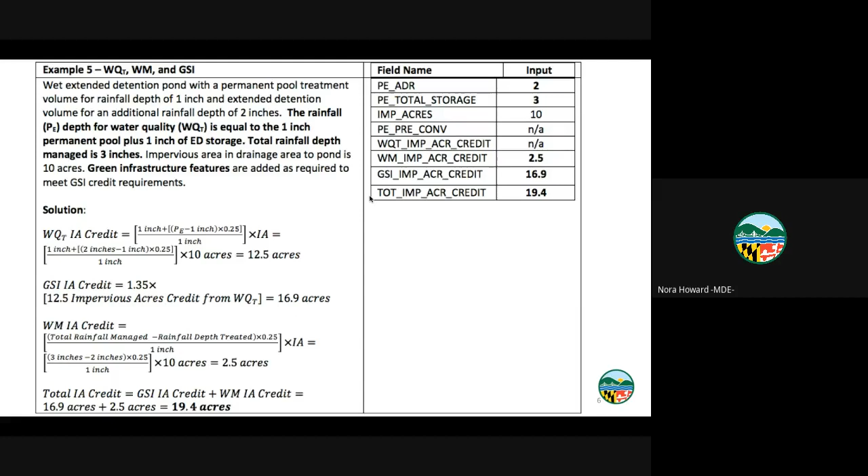And now we can use our watershed management impervious acre credit equation to see that we get 2.5 acres for watershed management, and we enter that in the watershed management impervious acre credit field. To find our total impervious acre credit, we will sum our 16.9 acres for GSI credit and our 2.5 acres for watershed management credit to see that we can enter 19.4 in the total impervious acre credit field.

In the last example, we'll use a conversion with water quality treatment and watershed management. There's a wet extended detention pond with a permanent pool treatment volume for a rainfall depth of 0.5 inches that gets converted to provide a permanent pool of 0.75 inches and an extended detention volume for an additional 2 inches. So the rainfall depth for water quality is equal to the 0.75 inch permanent pool plus 0.75 inches of extended detention storage. So the PE addressed is 1.5, and the total rainfall managed is 2.75 inches, so the PE total storage is 2.75. There are 10 impervious acres in the drainage area to the pond, so the impervious acres is 10. And now we do have a conversion.

So in the PE pre-conversion field, we will enter that 0.5 of the rainfall depth treated prior to conversion. To find our water quality impervious acre credit, this credit is based on the difference between the pre-conversion credit and post-conversion credit for water quality treatment. So to find the pre-conversion credit, we will use the PE pre-conversion of 0.5 to find that there were 5 acres of water quality treatment pre-conversion, and we will use the PE addressed of 1.5 and the water quality treatment co-benefit equation to see that the post-conversion water quality treatment credit is 11.25. To find the amount of water quality treatment credit that we can now report, we subtract the 11.25 credits post-conversion minus the 5 acres of pre-conversion credit to see that we can now claim 6.25 acres of credit for this project, and that is what we will enter in the water quality treatment impervious acre credit field.

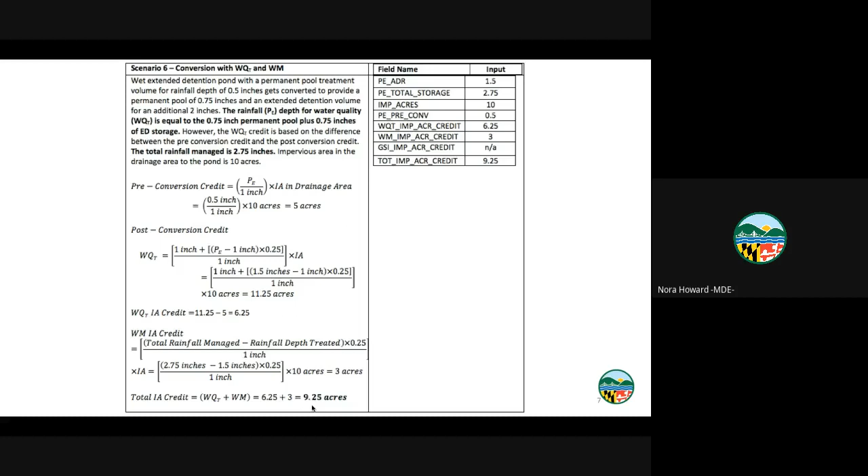We use the watershed management impervious acre credit equation to find that we can also claim 3 acres of credit for watershed management, and we enter that in the watershed management impervious acre credit field. We're not using GSI, so that field is not applicable, and to find our total impervious acre credit, we will sum the water quality treatment that we calculated above using the subtraction, so 6.25, plus the 3 acres for watershed management to see that we can report 9.25 acres of credit in the total impervious acre credit field. And now I'll open it up for questions on the last 2 presentations.

Okay, great. Thanks, Nora. Thanks, Stu. You know, these are new credits. These co-benefits, the green infrastructure and the watershed management, also known as climate change resiliency credits, giving credit for more volume. And we've had a lot of back and forth with a lot of the MS4s, and these are new credits and they're kind of hard to get your hands around. We've answered some from some local jurisdictions that have submitted the questions into us. And Carl has suggested maybe we have an independent session just on answering specific questions, and we can be open for that. And as I was talking, I think we did get a question that came in still.

This explains the crediting well. The reporting may be messier. For example, a new or converted BMP may treat impervious acres with varying levels of existing treatment. So the impervious acres in the geodatabase could be the actual total acreage, but the calculations you ran through use untreated acreage.

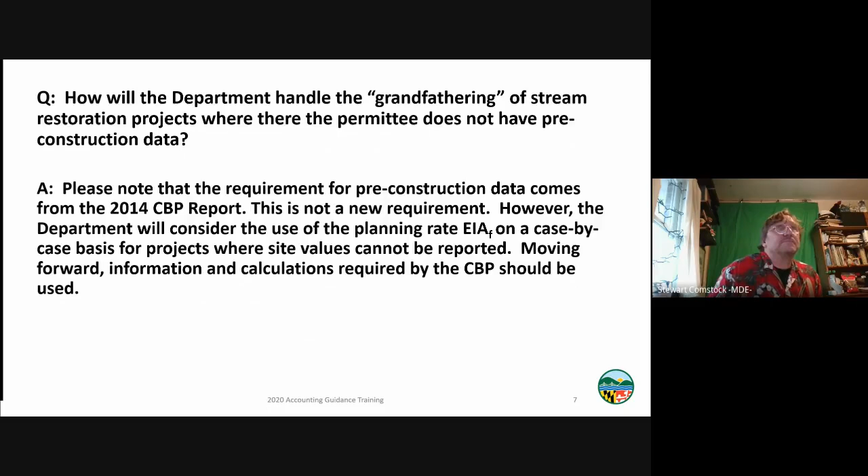And with that, I'd like to open the floor up again for any questions that you might have. Thanks, Stu, that was great. We got an easy one here for you.

So regarding trading, it says that this approach is a huge disincentive to trading going forward because MDE is essentially saying it's willing to change the trading rules, the currency, from one permit to the next. That could be catastrophic for permittees carrying a trade into the next permit.